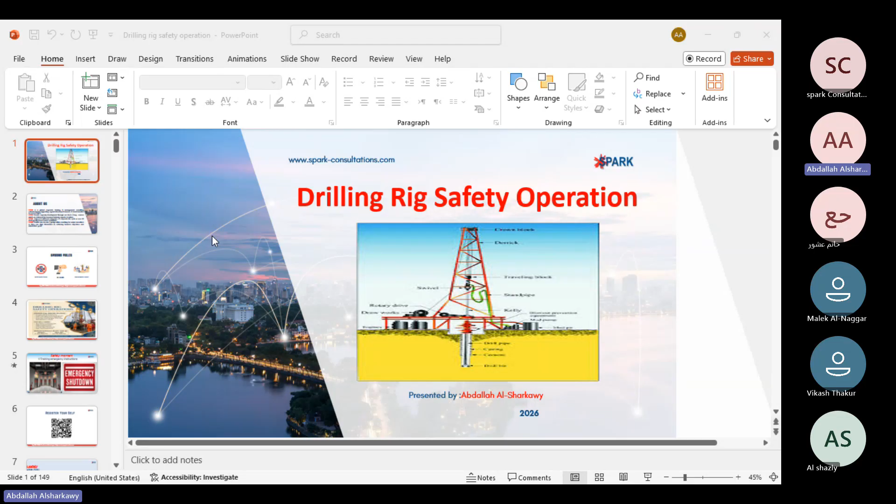We will start with some definitions about rig pass and safe drilling operation. Rig safety. What's the meaning of rig safety? It is the key to enter any drilling rig or workover rig, to have full knowledge of the hazards involved in the drilling operation. The drilling sector is one of the most dangerous fields in the oil and gas industry.

Rig safety is designed to provide the drilling crew and all drilling personnel a basic orientation for rig operation and safe working practice, to improve the safety performance of service contractors and exploration and production operators, and to assist both in satisfying federal, state and industry regulations and recommended practice.

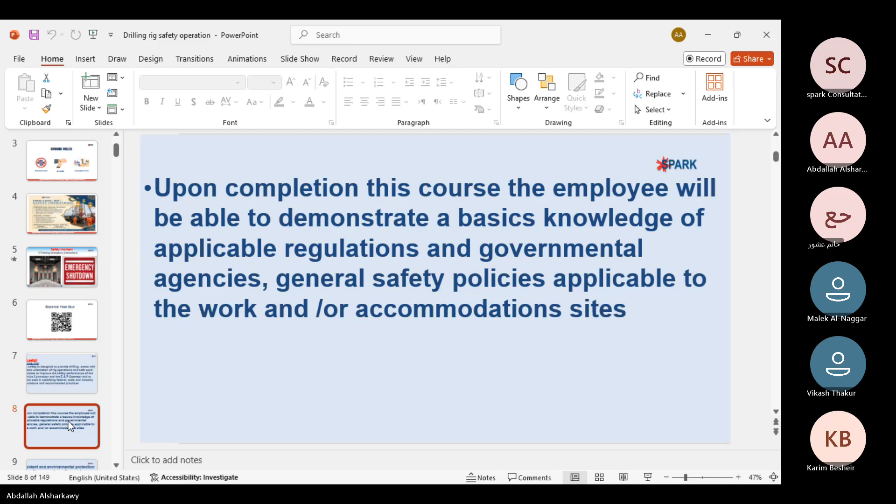Upon completion of this introduction course, the employee will be able to demonstrate a basic knowledge of the applicable regulations and governmental agencies' general safety policy applicable to the work and/or accommodation sites. What is the incident and environmental reporting procedure? The service contractor and customer working relationship, and employees' responsibility toward incident reporting in the drilling sector.

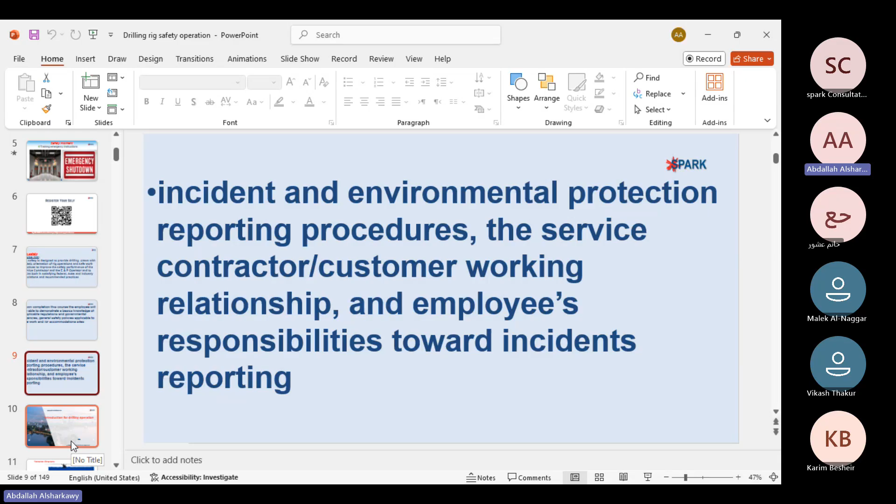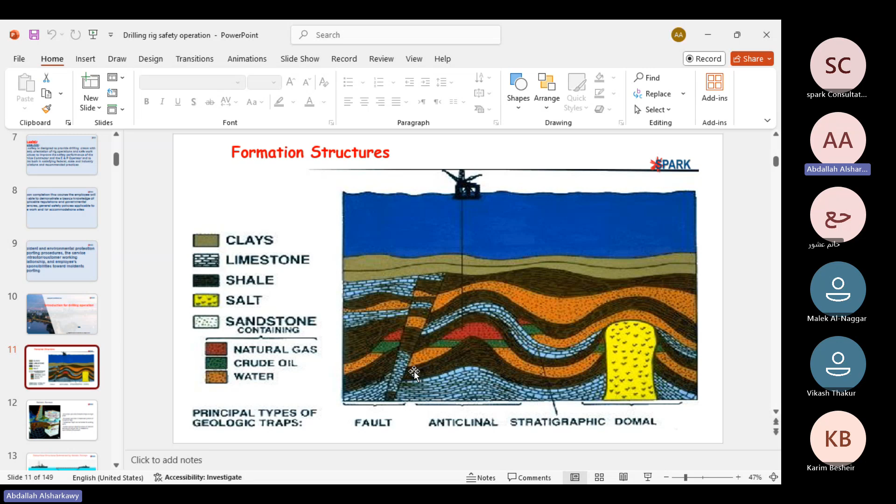The seismic survey is done by service companies, such as Halliburton, Schlumberger; many service companies carry out the seismic survey before the drilling process, at the beginning of the exploration process.

Types of drilling rigs. Drilling rigs are of two types. The first type is onshore drilling, and the second type is offshore drilling. And every type is subdivided into other types of drilling rig, such as conventional, fast-moving and heli-transportable rigs. For offshore, we can see submersible, semi-submersible, jackup, and also drill ship.

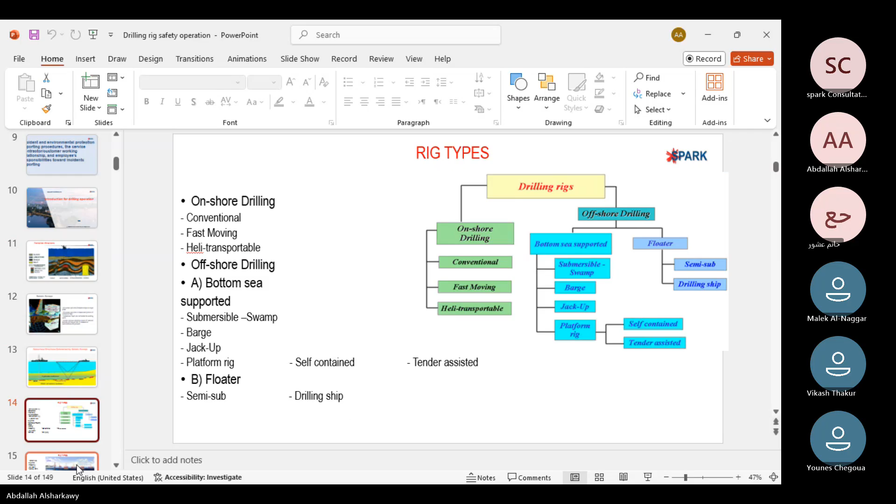All depends on what depth you want to reach, what depth you will produce oil or gas from. It depends on the exploration process, and the seismic should be applied before drilling operation. Then it depends on the horsepower of every rig. Horsepower differs from one rig to another to reach the required depth.

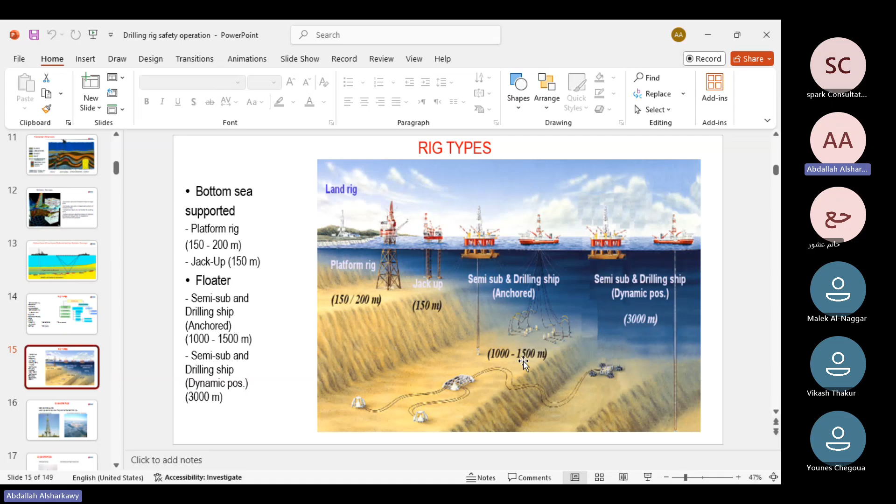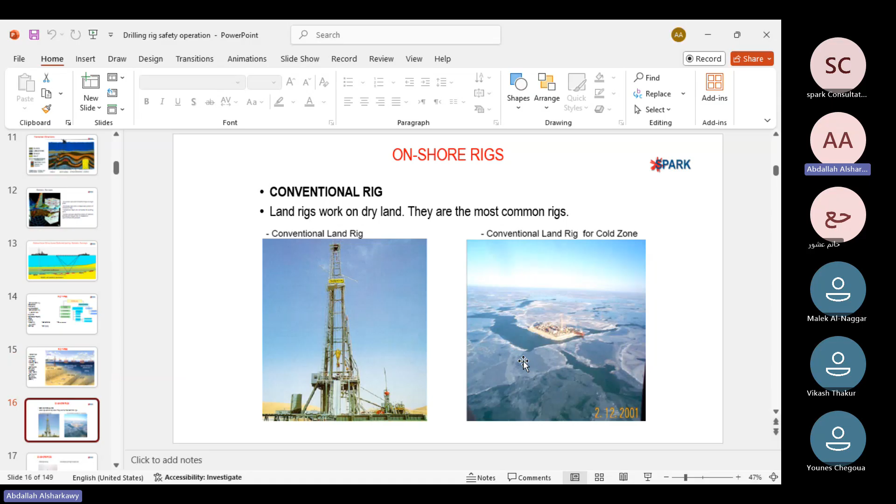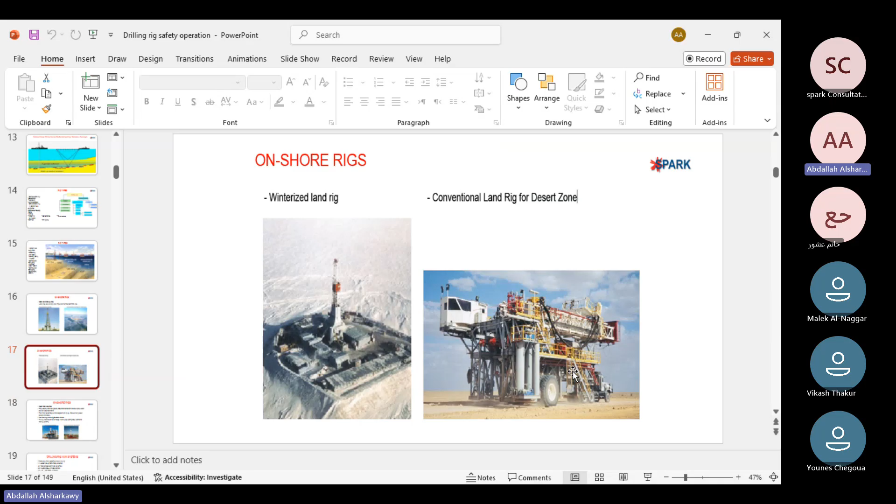Many examples of onshore rigs: conventional rig, and conventional rig for cold zone, as shown. Onshore rig, winterized land rig, and conventional rig for desert zone. This drilling rig is fast moving, equipped with wheels, and it is moved by heavy truck from one well to the other well. It needs road survey and very good leveling to move this rig from the old well to the new well.

Onshore rigs include the fast moving rig, and we can call it a workover rig. These usually have low power and dimensions for shallow wells, workover and abandonment. Their main advantage is their capability to rig up, move and rig down quickly and easily, from 2 days to 6 days.

Fast moving land rig G200 Soilmec. This rig handles stands of range 3 drill pipe, with a completely automatic racking system; 3 pipes of drill pipe are called a stand, and every stand contains 3 joints of drill pipe.

Drilling rig main systems. There are 4 main systems on a drilling rig: the hoisting and rotation system, the power generation or diesel generation system, the mud circulating system, and well control equipment. Hoisting and rotation system: mast, substructure, crown block, traveling block, top drive, then rotary table, drawworks system, drilling line, deadline anchor. These are all components of the drilling rig.

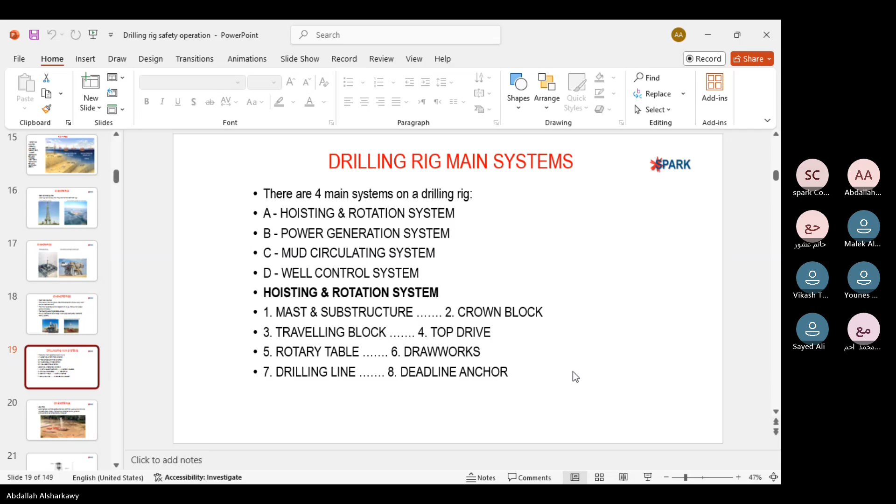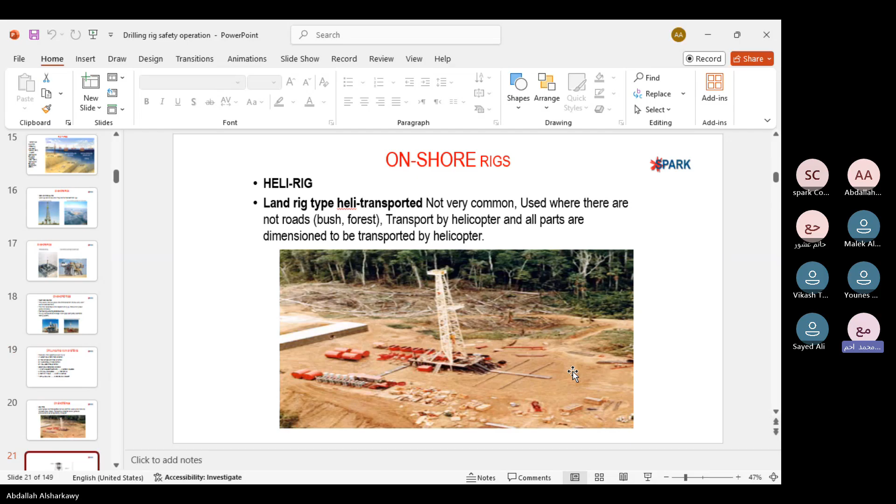This is the shape of drilling rig. From the top, crown block, and the traveling block, and top drive. And this construction is called mast. This is the mast of the rig. This construction on the pointer is called mast. So the mast consists of beams, I-beams and cross beams.

This mast contains the crown block and traveling block and top drive system. And this construction is called rig floor or substructure. Substructure is the first stage of the drilling rig. The second stage is the mast. So it is the main component of the drilling rig.

Workover rig. Workover rig mast is small and contains two joints of drill pipe, not three, but here is three joints called stand. The workover rig is called double stand. This is a clear difference between the drilling rig and workover rig.

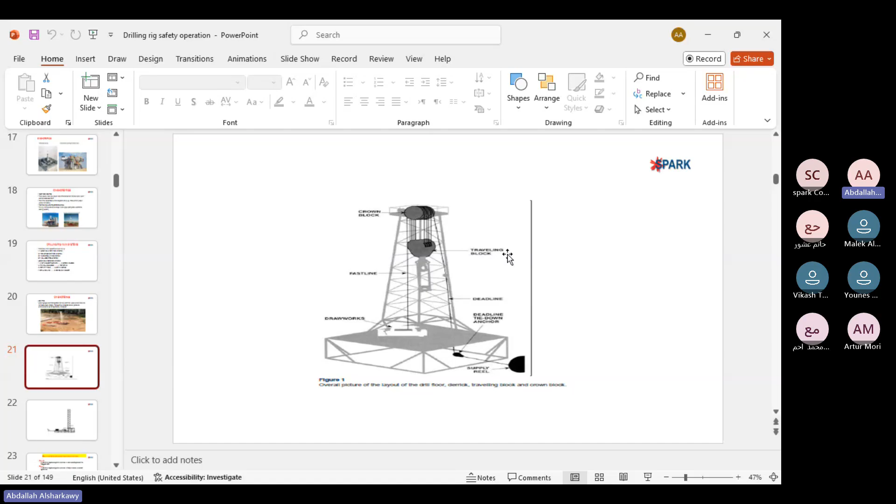Workover rig is for the workover operation such as frac operation, nitrogen operation, cleaning, tripping operation, acid injection, but drilling rig for cement job, casing job, and other complicated operations, but workover rig is used for cleaning and trip in, pull out of hole, run in hole operation.

Before you enter any drilling rig, you must have very important knowledge about the zones of this drilling site. Drilling site contains zones. Zone 0, zone 1 and zone 2. Zone 0, in which an explosive gas and air mixture is continuously present for long periods. Zone 1, in which an explosive gas mixture is likely to occur in normal operation. Zone 2, in which explosive gas mixture is not likely to occur in normal operation.

In some countries, class and division classification is used instead of zone classification. We can verify the difference between the British classification and the American classification for rig site. We are showing the British classification, zone 0, zone 1, zone 2. But the American classification divides every zone into class and division.

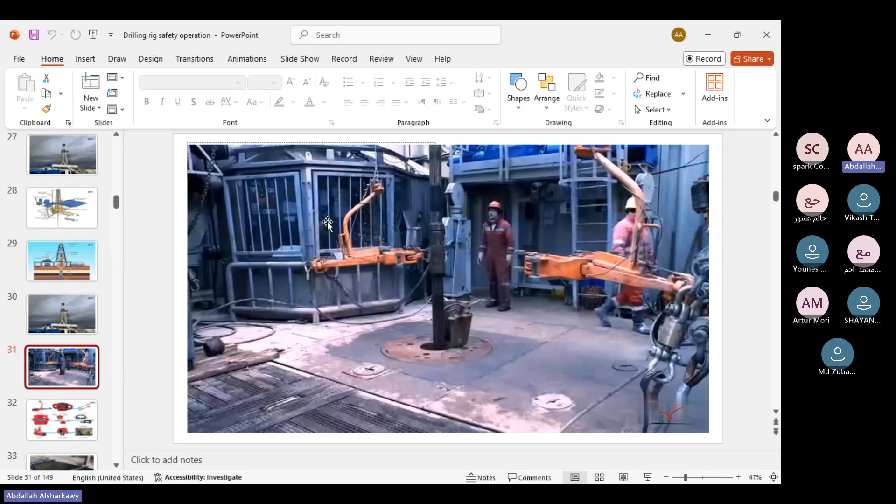What is this board? Finger board or derrick board? It is the board where the monkey man or derrick man works to connect and disconnect drill pipe in coordination with the driller at the rig floor. And we can see also another. This is the rig floor and this is the driller cabinet or console. Driller works as supervisor and controller of the top drive and draw work system and every powered equipment at the rig floor.

So this is monkey board or derrick man board. Derrick man board to connect and disconnect drill pipe during trip in or trip out operation, in other terms pull out of hole or run in hole. This is the rig floor area containing setback area, heavy wooden plates to install drill pipe on it. This is BOP area, blowout preventer.

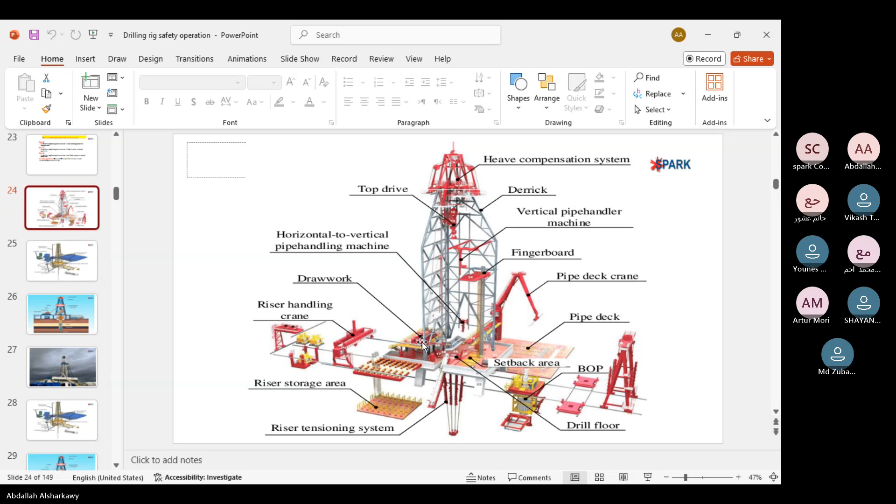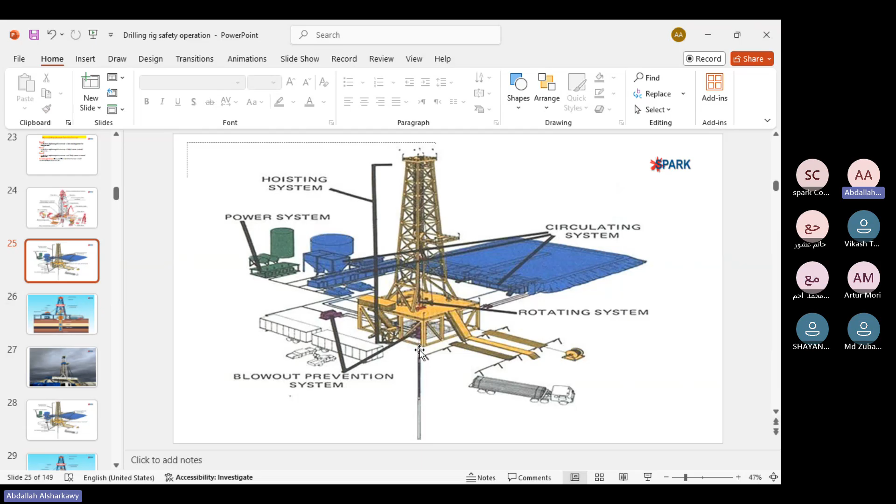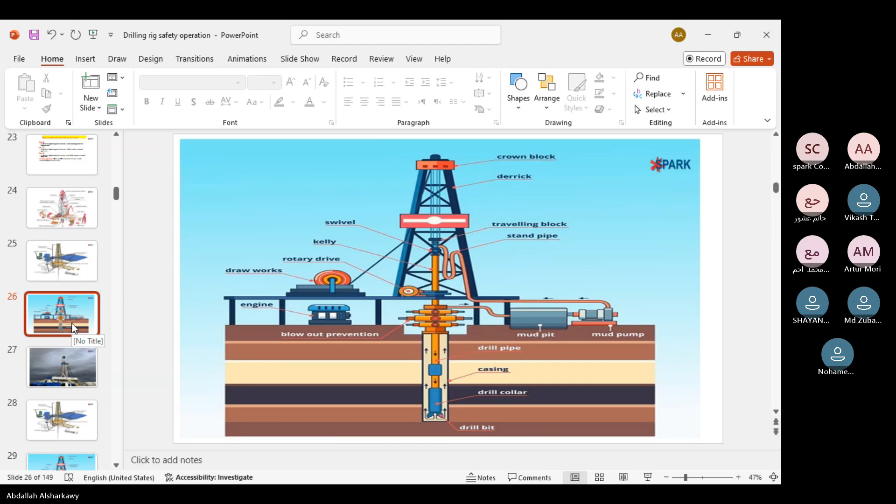This is a drilling rig. This is the mast, constructed from beams, and this blue board is the monkey man or derrick man board. He works above this construction to connect drill pipe, to install stands in the hole or pull stands out of the hole. And this rubber hose is a mud hose circulating mud inside the well.

This is the drill pipe inside the well. This is the well and this is drill pipe. How do these people connect this tool joint to each other? By tongs, right and left, to connect every joint to the other to construct three joints. Three joints are called a stand in the drilling rig, and in the workover rig a double joint is called a stand.

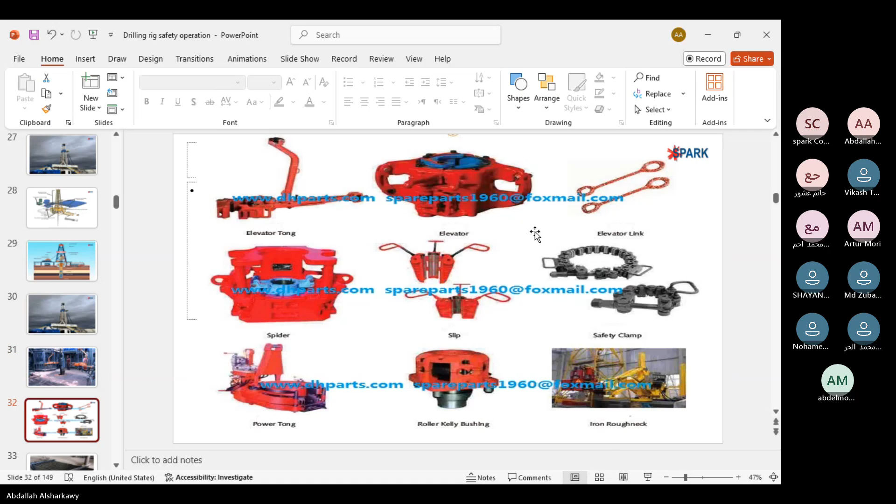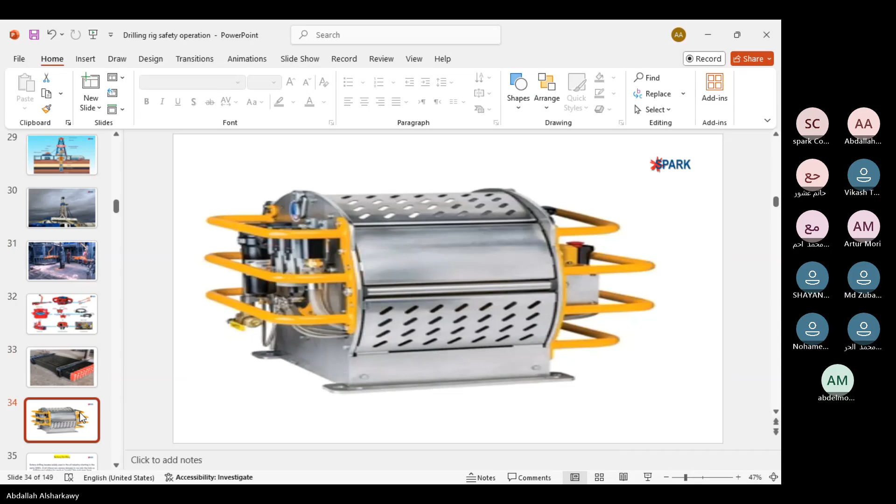Every drilling rig contains three types of winches. The first is the man riding winch. It is designed only for lifting persons. The other winch is called air tugger or air winch, with high safe working load. It is used for lifting drill pipe and casing pipe. Every drilling rig should contain two heavy equipment air winches. The third type of air winch is called the BOP winch, blowout preventer winch, used for rig up and rig down of the BOP.

Again, every drilling rig contains three types of air winch or hydraulic winch. The first type is man riding only, the second type is equipment lifting only, and the third type is designed only for rig up or rig down of the BOP, the blowout preventer air winch.

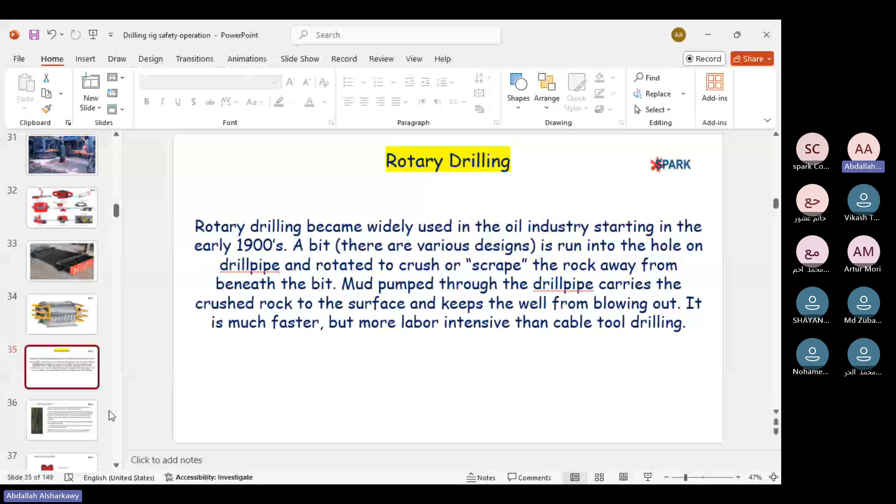Drilling a well. A drill bit designed for the expected type of formation to drill is lowered into the well on the drill string. The drill string and the bit are rotated by a rotary drive on the rig floor, a top drive in the derrick, or a mud motor directly above the bit, which is powered by the force of the mud flowing through it. The bit crushes or grinds the rock beneath it into pieces called cuttings.

Drilling mud is circulated down the drill pipe and through openings called jets in the bit. The mud washes the formation cuttings from beneath the bit and carries them to the surface. When the bit fails or wears out, all of the drill string must be pulled from the hole to replace the bit. It is called a trip: trip in or trip out operation.

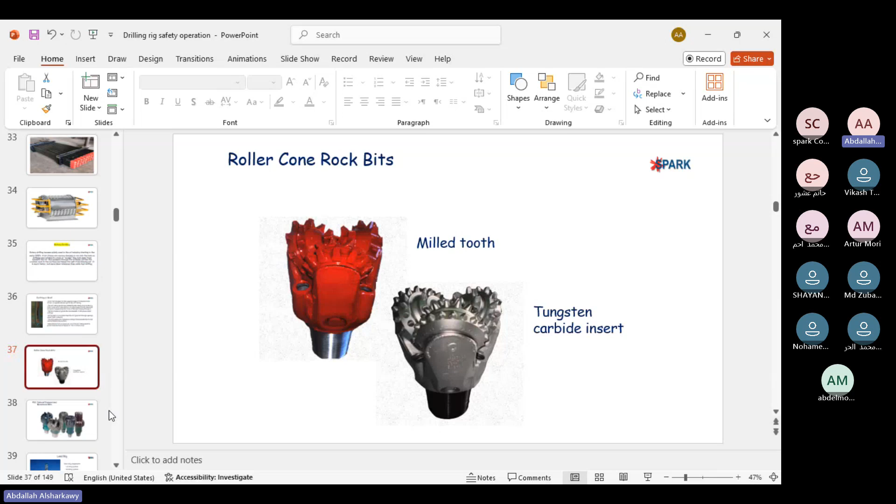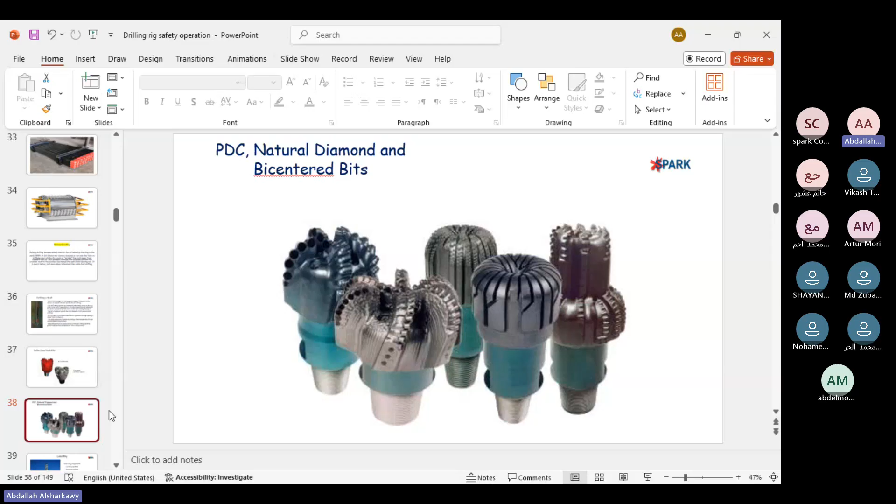Types of bits: roller cone rock bits, mill tooth, tungsten carbide insert, PDC, natural diamond and bicentered bits, as shown in many shapes of drill bits. Basic rig components: hoisting system, rotating system, power plant system, mud circulating system, well control equipment. All other rigs adopt these basic components to their working environment.

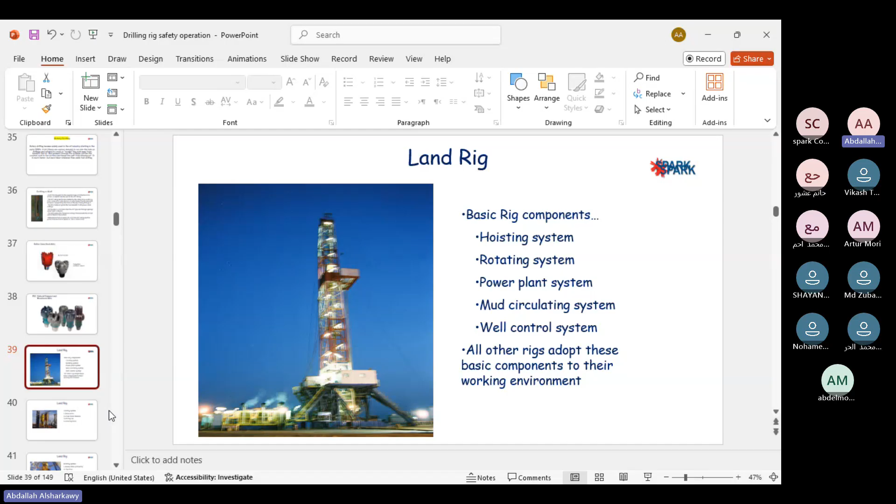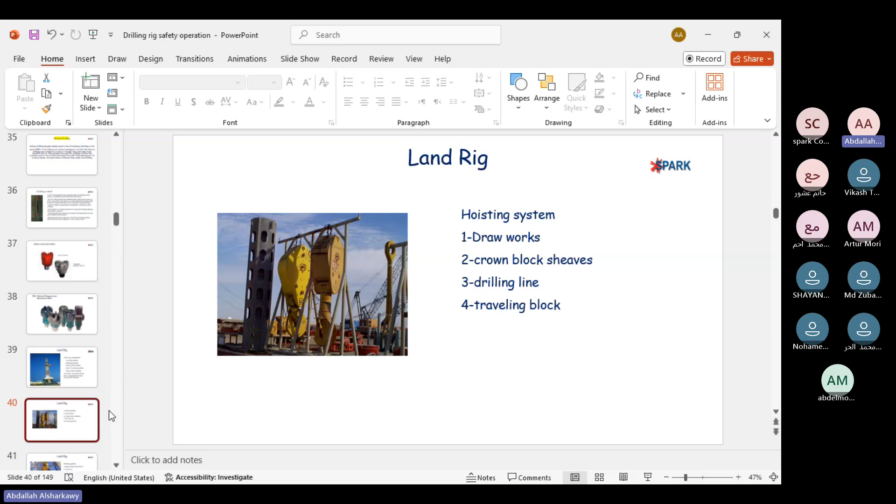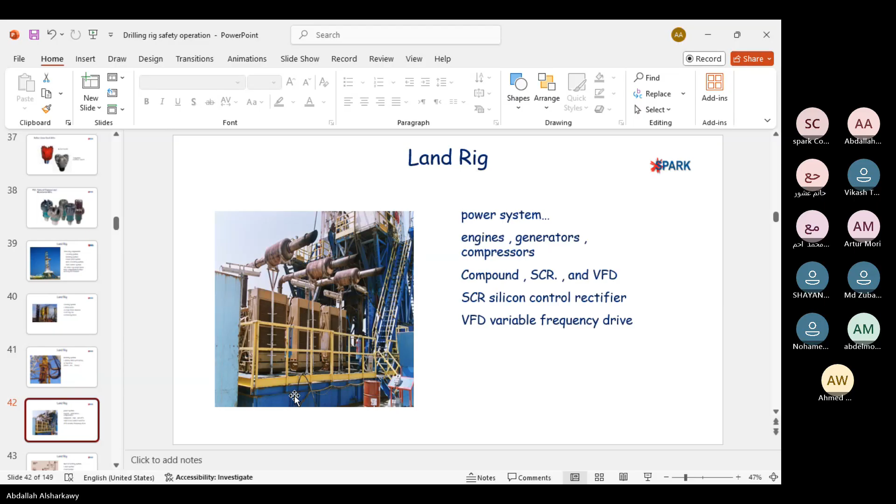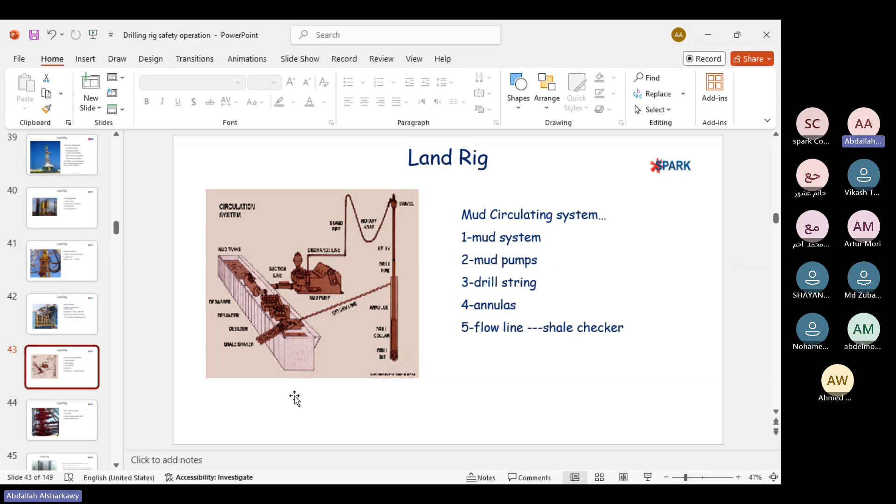BOP, blowout preventer. It is located under the rig floor. It is critical equipment at any drilling rig. It should be inspected Category 1, Cat 2, Cat 3, Cat 4, and Cat 5. Why? If any failure happened in the BOP system, it would lead to complete damage or fire of the drilling rig, and would put personnel in a high risk state.

Any failure of function of the BOP will lead to fire and explosion of the drilling rig and could lead to loss of life of the drilling crew. Well control equipment is divided into diverter, blowout preventer, and BOP control unit.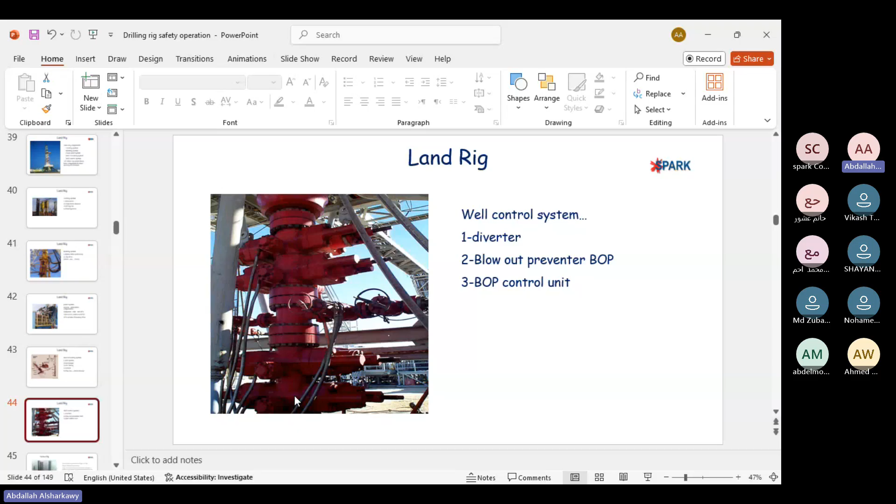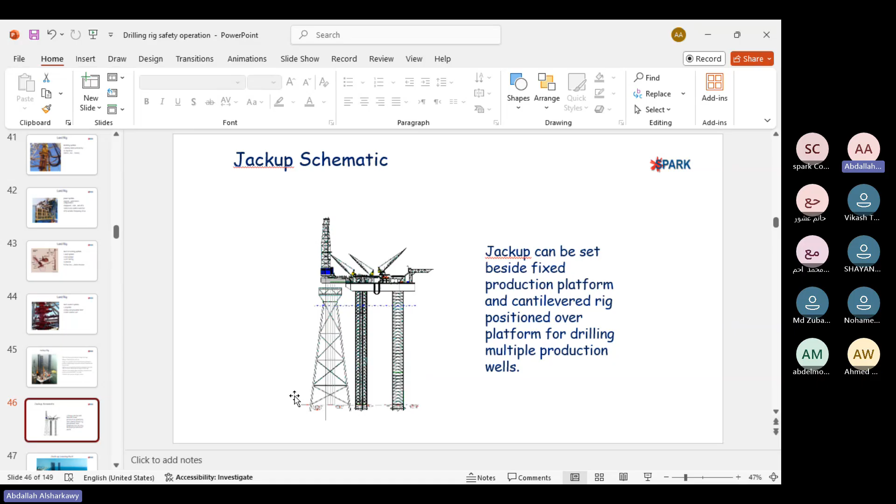Jack-up schematic. A jack-up can be set beside a fixed production platform and the cantilevered rig positioned over the platform for drilling multiple production wells. Jack-up leaving port. Jack-up in port.

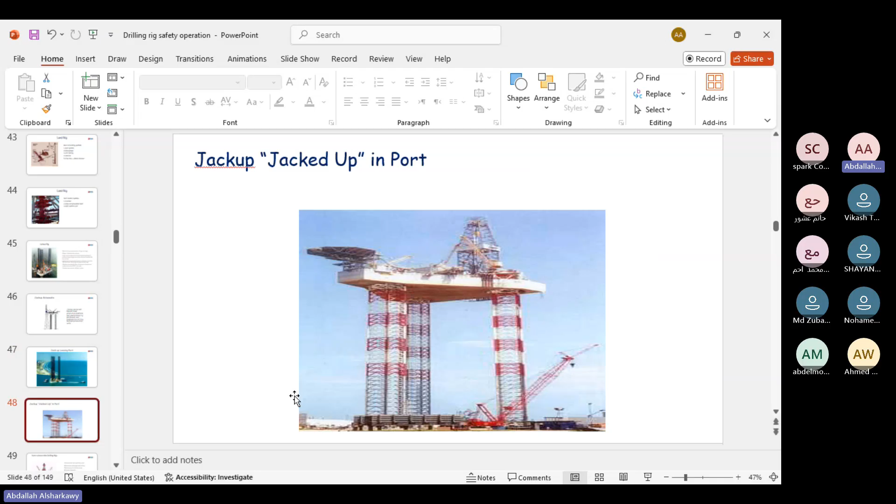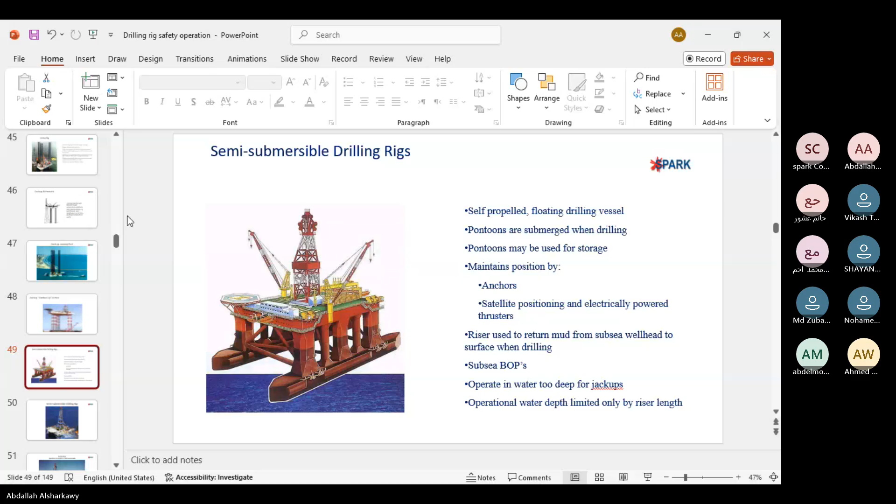Semi-submersible drilling rig. Self-propelled floating drilling vessel. Pontoons may be used for storage. Position is maintained by anchors or satellite. A riser is used to return the mud from the subsea wellhead to the surface when drilling. Subsea BOP, operated in water too deep for jack-ups. Operational water depth is limited only by riser length. Semi-submersible drilling rig, as shown. Drill ship operations are similar to semi-submersibles.

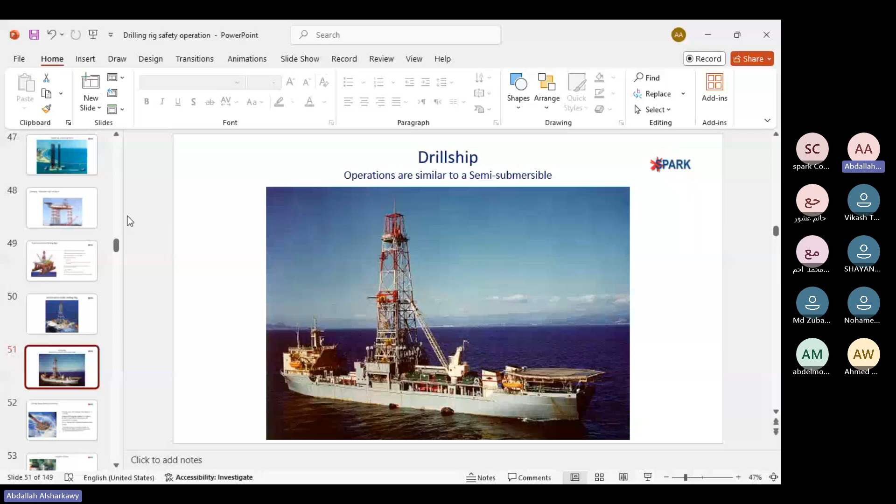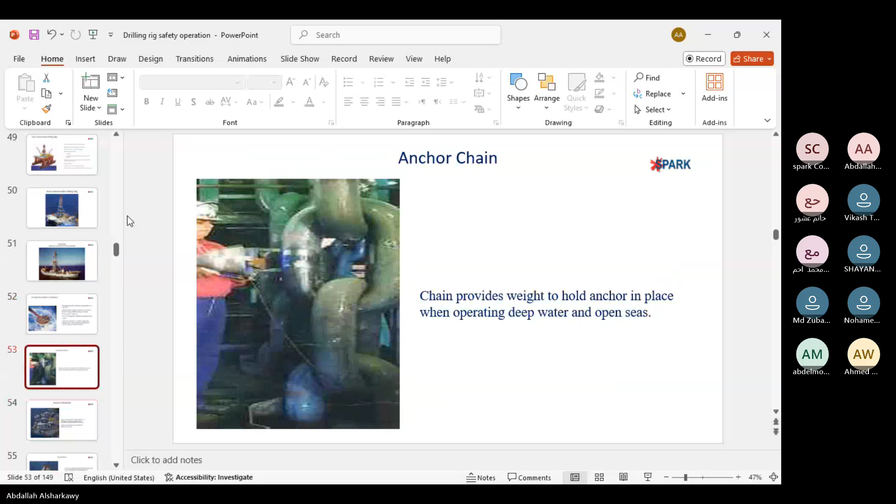Top drive. The top drive is suspended from the traveling block. It rotates the drill string and drill bit. Drilling mud circulates through the kelly hose and down through the drill string to the hole. As we saw before, we are wet drilling, not dry drilling. Wet drilling with a chemical called mud.

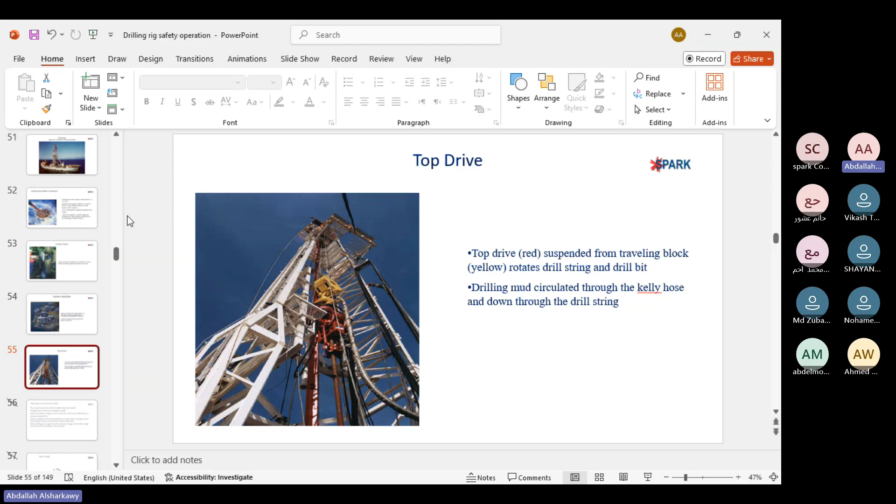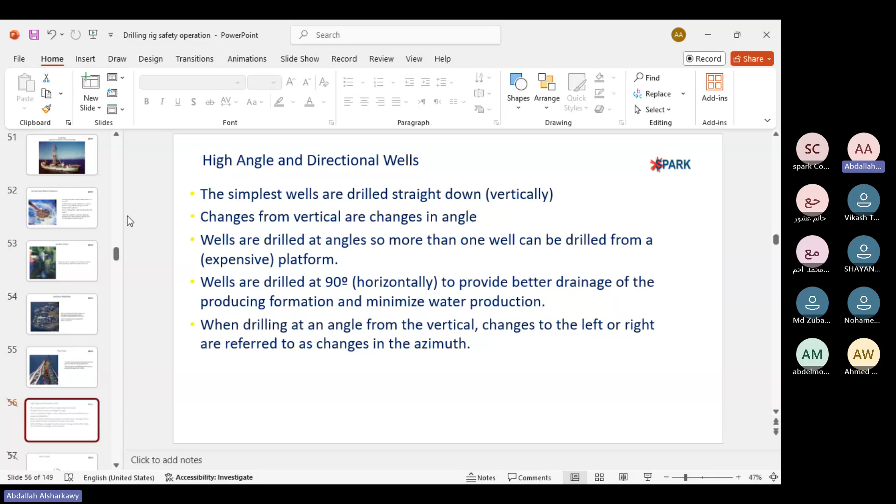High angle and directional wells. The simplest wells are drilled straight down vertically. A change from vertical or change in angle is called directional drilling. Wells are drilled at an angle so more than one well can be drilled from an expensive platform. Wells are drilled at 90 degrees horizontally to provide better drainage of the producing formation and minimize water production. When drilling at an angle from the vertical, changes to the left or the right are referred to as a change in azimuth. Hole angle, called directional drilling.

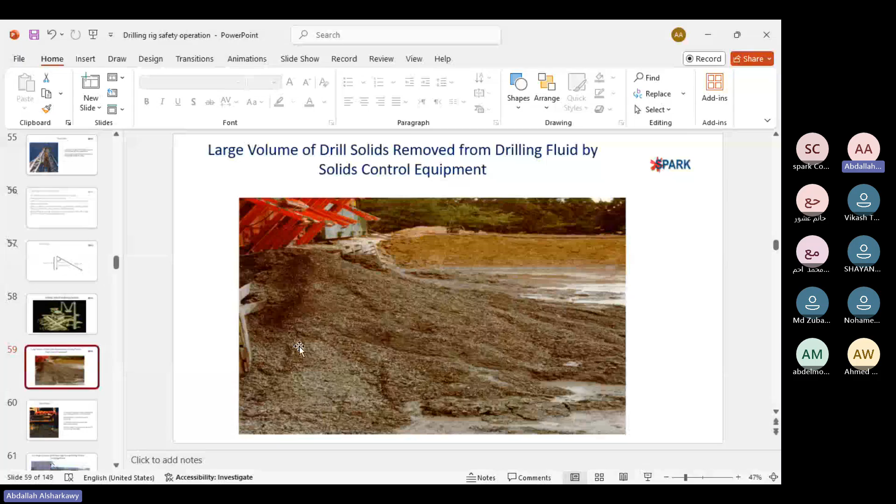After mud exits from the hole or from reflux, it is carried out at the shale shaker or solid control equipment to the mud pit. This is the mud pit. It contains the cuttings exiting from the shale shaker or solid control equipment. This is a sample of a shale shaker.

In the shale shaker, the soft clay or soft mud enters to forward to the tanks, and the cuttings and solids exit to the waste pit or mud pit. It is the first piece of solid control equipment the mud passes through when it reaches the surface. It separates drill solids from mud by screening. Vibration of the screen increases the processing capacity. Several shakers are often used at once to process high flow rates.

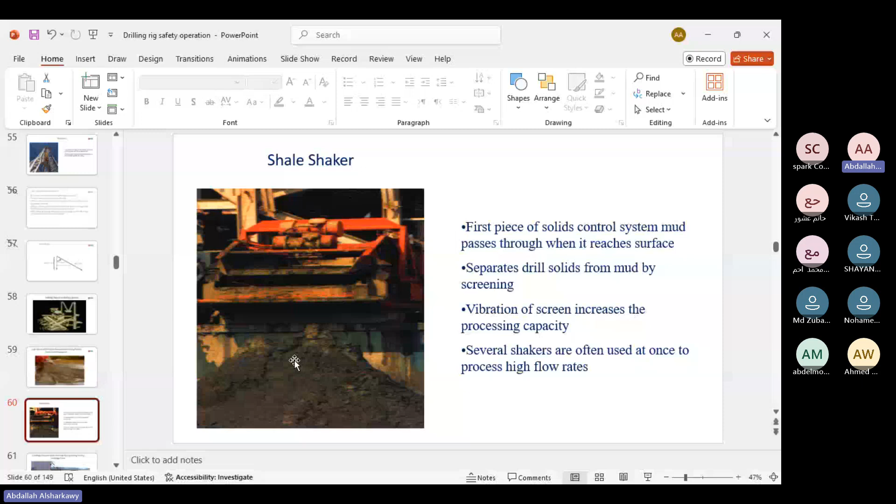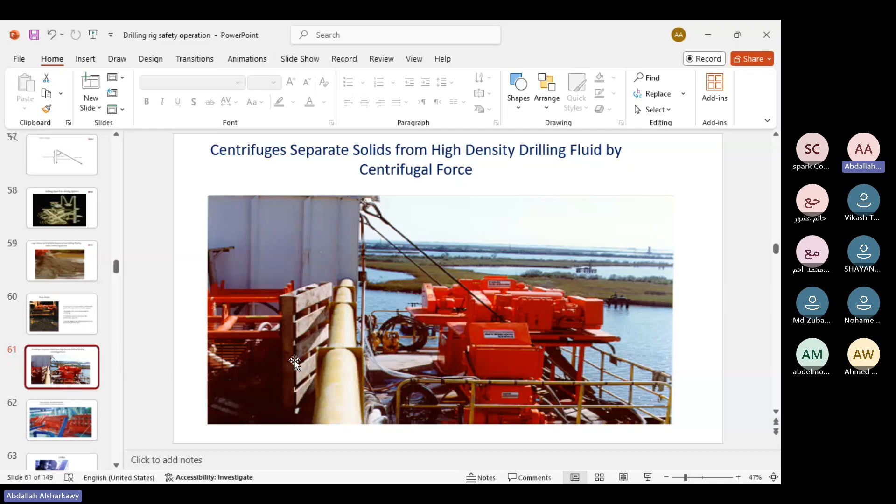This is another shape of shale shaker or solid control equipment. The centrifuge separates solids from high density drilling fluid by centrifugal force. Hydrocyclone desander and desilter are used to separate drill solids from low density fluid. All this, called solid control equipment, is to improve mud properties before

redirecting it to the hole by mud pump to the drill pipe through the top drive, and through the drill pipe to the bit, and then to the formation, and the reflux to be returned to the mud tanks.

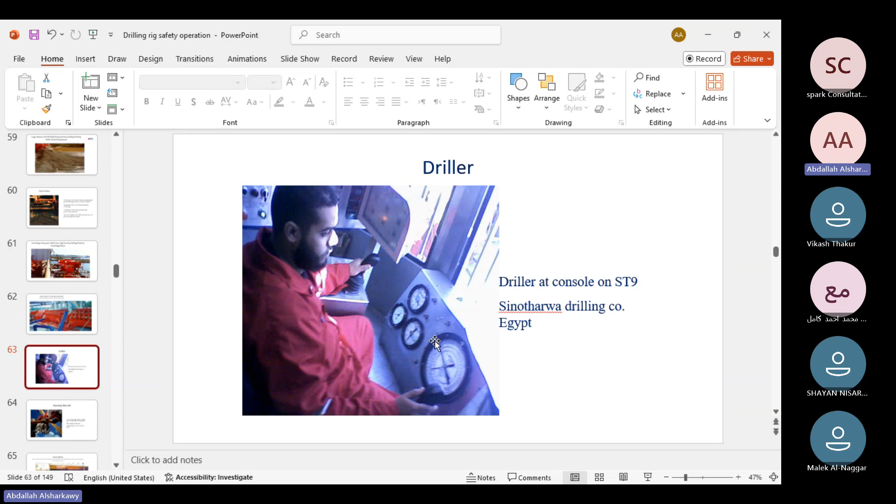We are back again to continue the drilling rig safety operation course. This slide shows the driller cabin. This is an actual photo from the driller for Sinotharwa Drilling Company, rig number 9 in Egypt. This is the control room of the driller. The driller is supervisor of his crew. He's a key person. He controls the top drive, drawworks and all drilling equipment at the rig floor.

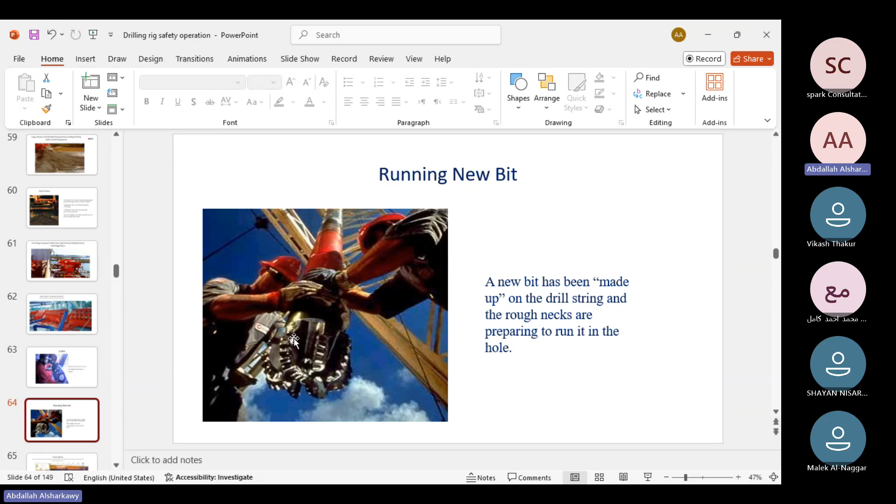Running a new bit in the hole. A new bit has been made up on the drill string and roughnecks are preparing to run it in the hole. Drawworks system. As we said before, every drilling rig is known by its horsepower.

Horsepower refers to drawworks or drum capacity, which is used to pull the drill line through the crown sheaves and traveling block, raising and lowering the drill string in the hole, and also lowering and raising the mast and substructure. All this operation is made by this equipment called the drawworks system.

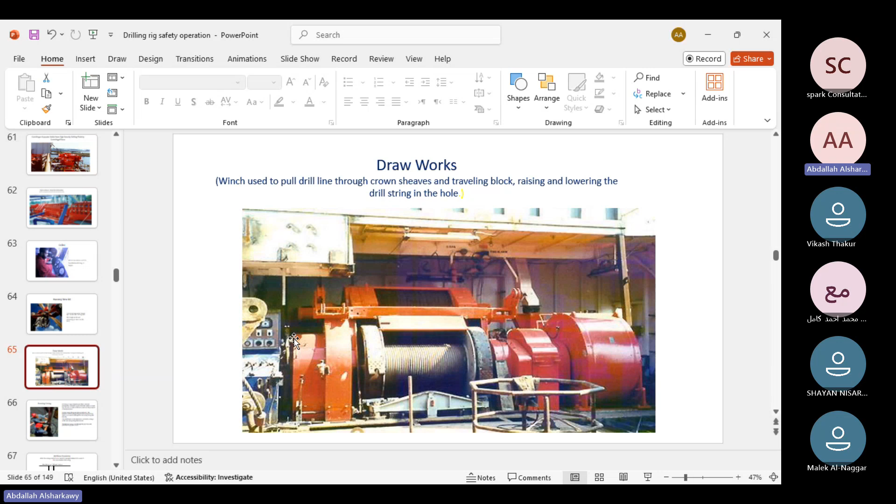Running casing. Casing is large diameter pipe permanently cemented in place from the surface or mud line of the well, to stabilize the hole and seal off pressurized or fractured zones to prevent hole fill. Several casing strings are run on each well.

The diameter of each casing string becomes progressively smaller as it must fit through the last casing string that was run. The BOP stack or Christmas tree is bolted to a flange on the last casing string that was run. Production casing is set through the pay zone and perforated to produce the well in the oil reservoir.

This is the diagram of the hole: open hole, liner or production casing, intermediate casing, surface casing, and this is the surface or wellhead. After the casing or liner is run, cement is pumped behind to seal off the zone behind the casing, between formation and casing. Again, you should know that cement is pumped into the space between casing and formation.

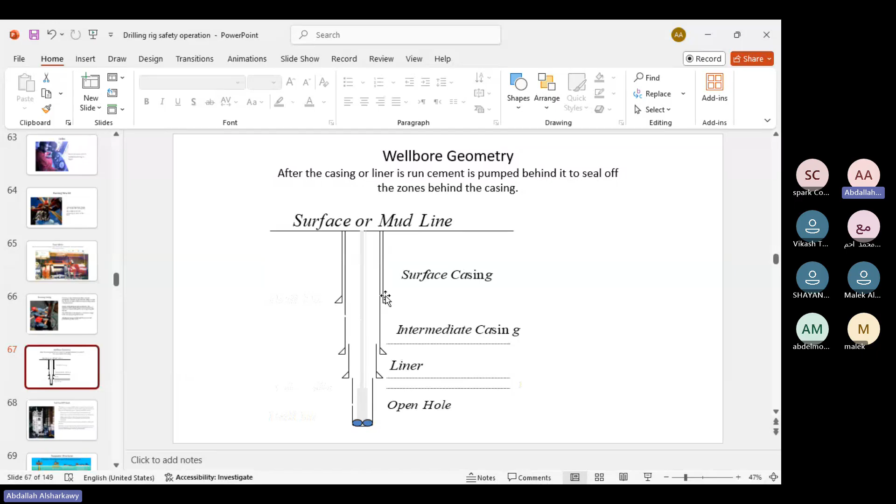Pipe ram, which will close and seal around the drill pipe. Blind ram, to seal the well off when the pipe is out of the hole. Shear ram, which is used to shear any pipe in the drill string, including drill collars, and seal the well off in an emergency.

The BOPs have connections for riser and booster, choke and kill lines, one on the right and the other on the left. Choke and kill line: the choke to absorb the pressure released or coming from the hole, and the kill line to kill the well in case of a kick or blowout.

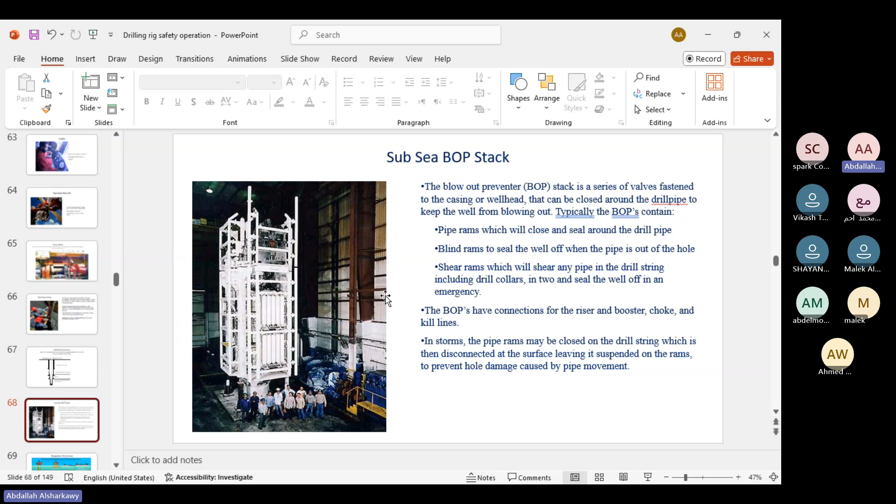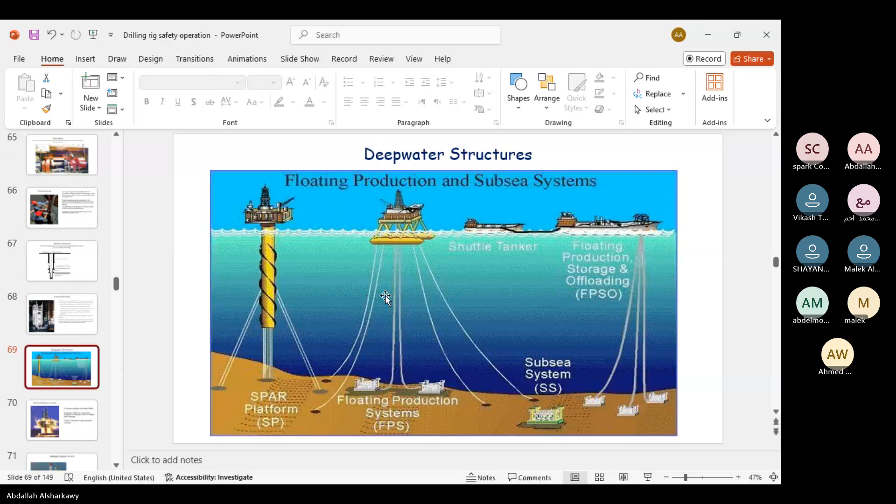In a storm, the pipe ram may be closed on the drill string, which is then disconnected at the surface, leaving it suspended on the ram to prevent hole damage caused by pipe movement. Deep water structures, floating production, and subsea systems. Different shapes of offshore drilling rigs.

In this section, we will explain and demonstrate many terms and hazards involved in the drilling sector. Keywords, abbreviations and terms. IOGP Life Saving Rules. International Association of Oil and Gas Producers, IOGP Life Saving Rules, LSR.

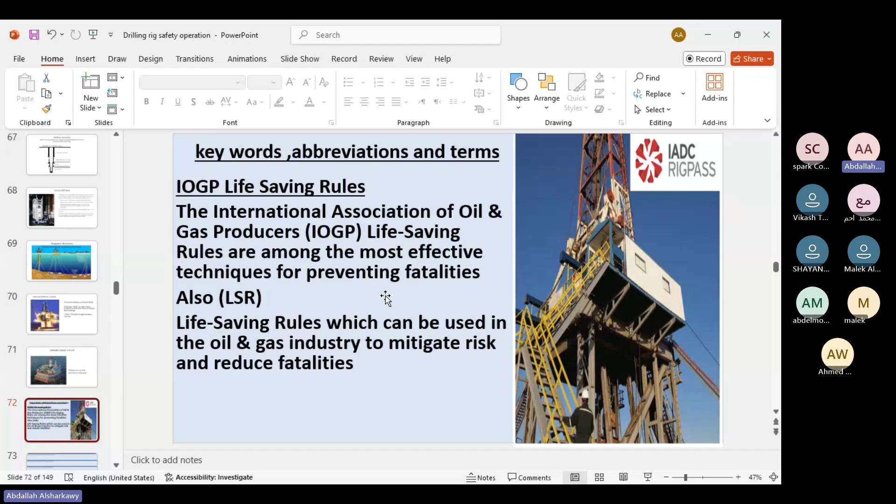Among the most effective techniques of preventing fatalities are life-saving rules, which can be used in the oil and gas industry to mitigate risk and reduce fatalities. IADC is the guideline or main standard of the drilling industry, the International Association of Drilling Contractors.

IOGP, International Association of Oil and Gas Producers. E&P companies, Exploration and Production companies. PPE, Personal Protective Equipment. COW, Control of Work. ISP, Incident Statistics Program.

SSOF, Safe System of Work. PTWS, Permit to Work System. JSA, Job Safety Analysis. JRA, Job Risk Assessment. PJSM, Pre-Job Safety Meeting. TOFS, Time Out for Safety.

Again, Safe System of Work is some instruction referring to three factors. The first factor is the policy. Every drilling company has a policy called HSE policy. The second factor is safe working instruction. Every drilling or workover rig should have safe working instruction. The third factor is SOP, Safe Operation Procedure. You should know these three factors consist of Safe System of Work.

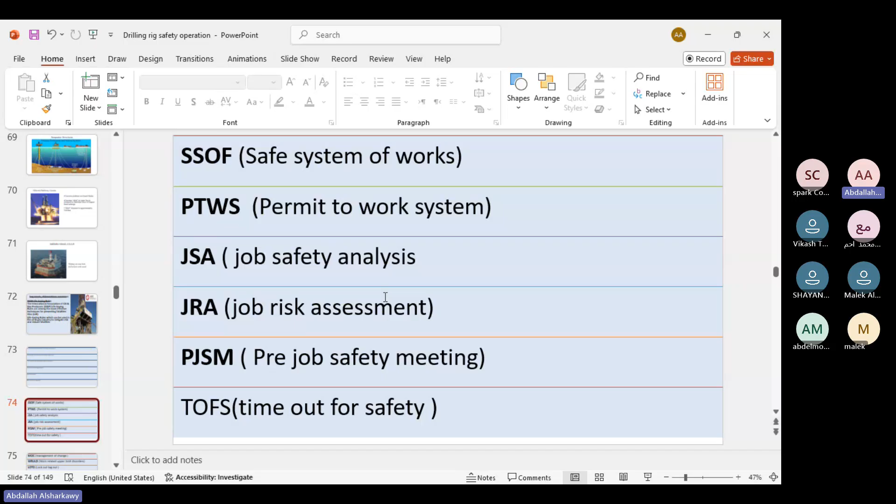What is management of change? In the drilling rig, you can see change of design, change of construction, change of operation, any project activities. It should obey the MOC document, approved by the assigned departments. This is called MOC, management of change. Other terms: MOC can be for design change, procedure change, project change, and asset change. MOC should be approved by top management.

Work-related upper limb disorder. It refers to muscular disorder and disease.

LOTO, lockout tag out, for isolation of powered equipment. We will divide it into two parts: the first part is mechanical isolation, and the second part is electrical isolation. If you're working in maintenance or in the drilling crew, you should have the lockout tag out procedure - how you can lock the powered source and tag a sign to prevent anyone from accessing your job.

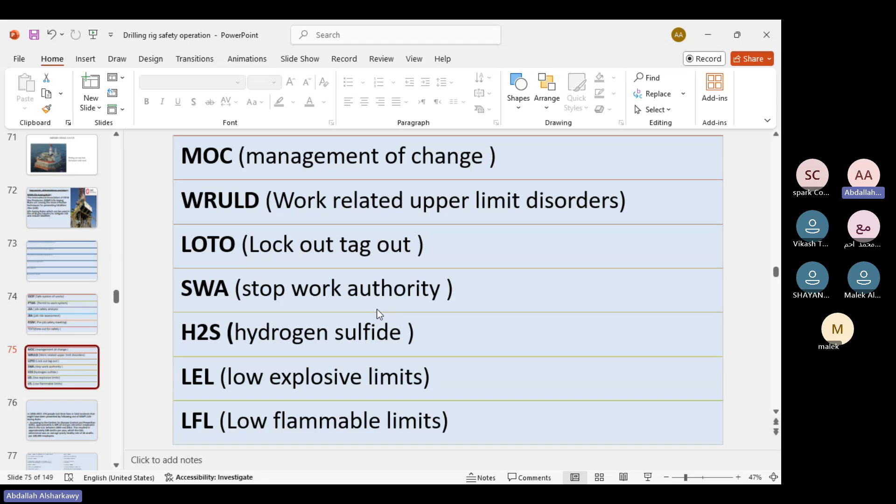We will show the main RigPass elements: basic safety, respect for coworkers, drug and alcohol policy, driving safety, personal protective equipment, hazard awareness communication, hand safety, good housekeeping in the rig, electrical safety appliance, hazardous material, occupational health, hydrogen sulfide, job safety analysis, back safety, working at height, dropped objects, lockout tag out, rigging and lifting operation, forklift safety, environmental protection and waste management, wildlife hazards awareness worldwide, permit to work system, management of change, first aid and blood-borne pathogens, fire prevention and response, incident reporting and investigation.

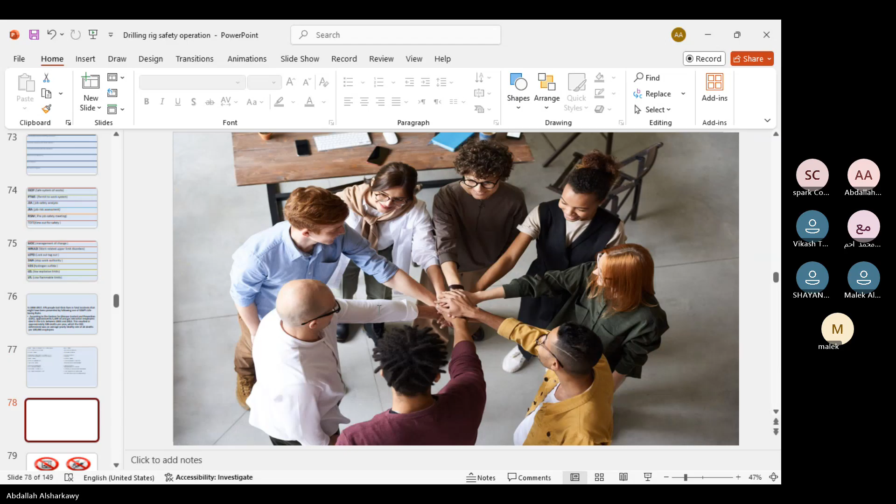Type of PPE. PPE includes high visible clothing, safety footwear, safety harness, eye protection, gloves. We have rubber gloves, cotton gloves, mechanical gloves, and electrical resistance gloves. Safety helmets, hearing protection, divided into ear plugs or ear muffs.

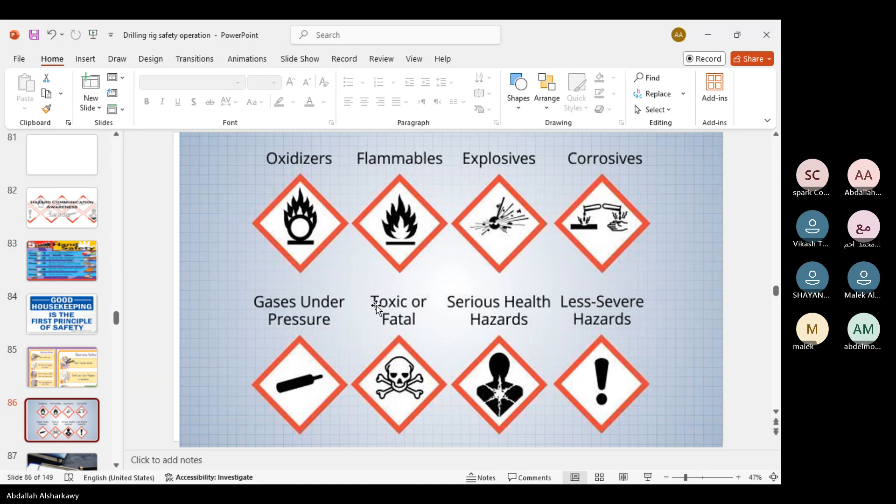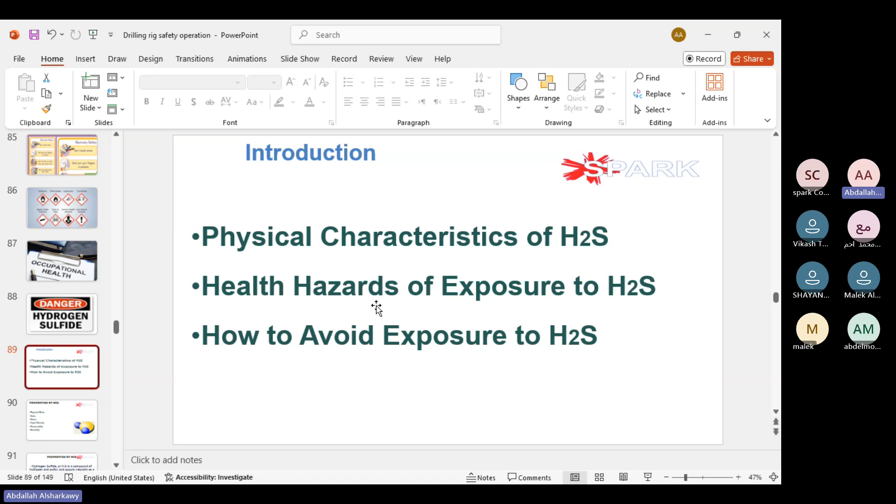Occupational health. Hydrogen sulfide. What is hydrogen sulfide? Physical characteristics of hydrogen sulfide. Health hazard from exposure to H2S. How to avoid exposure to H2S.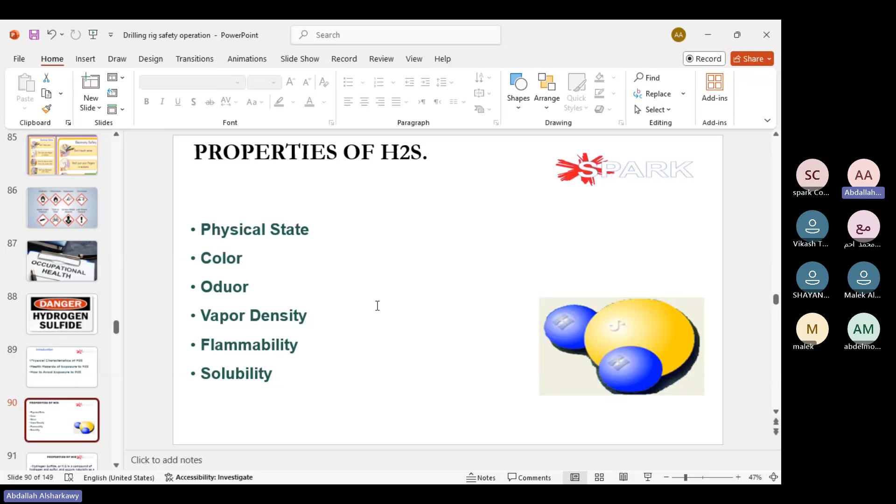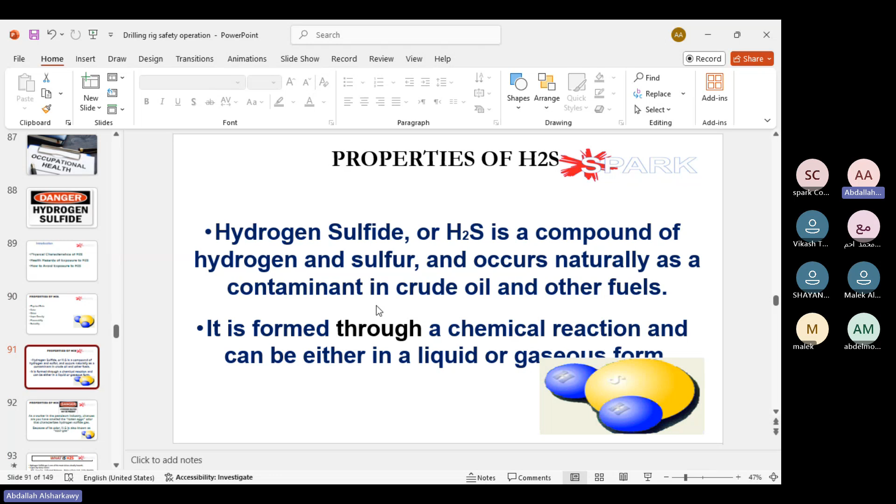Color, odor, vapor density, flammability, solubility. Hydrogen sulfide is a compound of hydrogen and sulfur and occurs naturally as a contaminant in crude oil and other fuel. It can form through a chemical reaction and can be either in liquid or gaseous form. As a worker in the petroleum industry, you may have smelled the rotten egg odor that characterizes hydrogen sulfide gas. Because of its odor, H2S is also known as sour gas.

Hydrogen sulfide gas is one of the most vicious deadly hazards. It is called by many names: H2S, sour gas, sulfurated hydrogen, hydrosulfuric acid, sulfur hydride. Every employer should provide training on protection measures and first aid where this gas is present and how to recognize it. There should be a policy concerning this gas, very close supervision, and awareness and precaution shall be kept at highest alert.

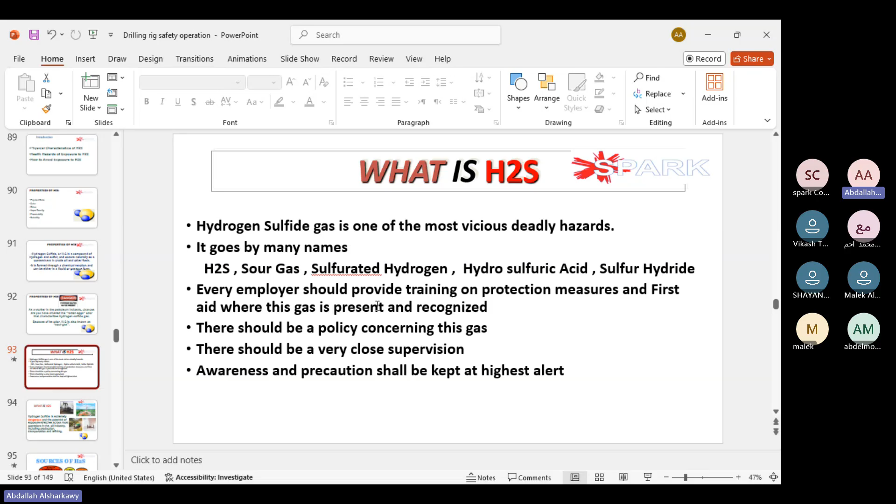Hydrogen sulfide is extremely dangerous and the potential for exposure stretches across most operations in the oil industry, including production, transportation, refining, and no doubt drilling.

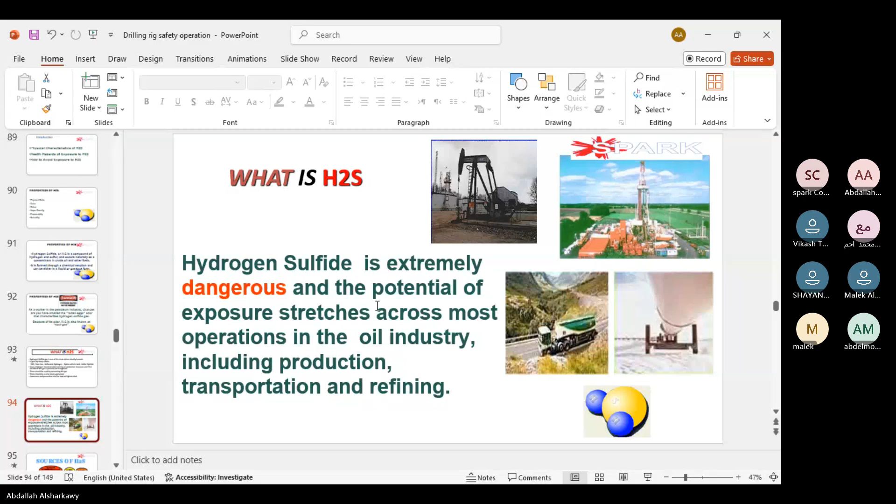Sources of H2S: gas plants, petrochemical plants, refineries, batteries, underground mines, sewers, blasting with black powder, oil and gas wells, commercial laboratories, sulfur recovery plants, and sewers.

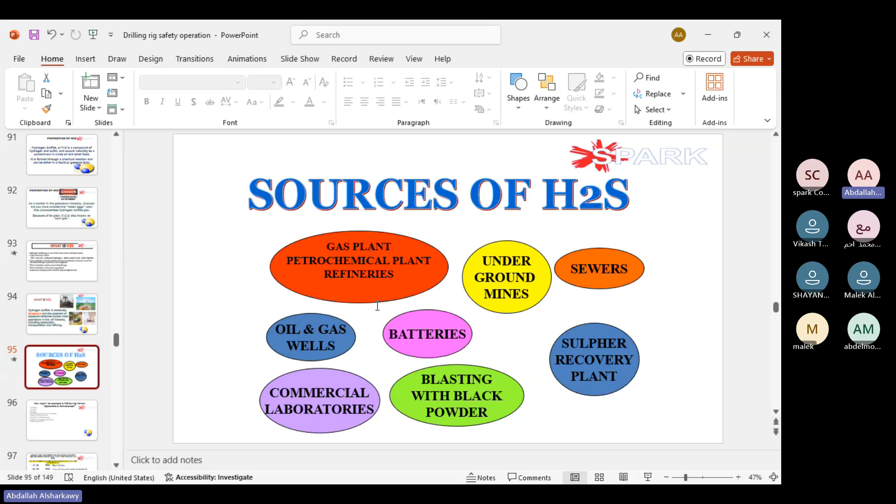Doses: from 10 to 20 ppm, irritation; from 20 to 100 ppm, loss of sense of smell, headache and nausea; from 100 to 300 ppm, respiratory difficulty and pulmonary edema; over 600 ppm, unconsciousness and sudden death.

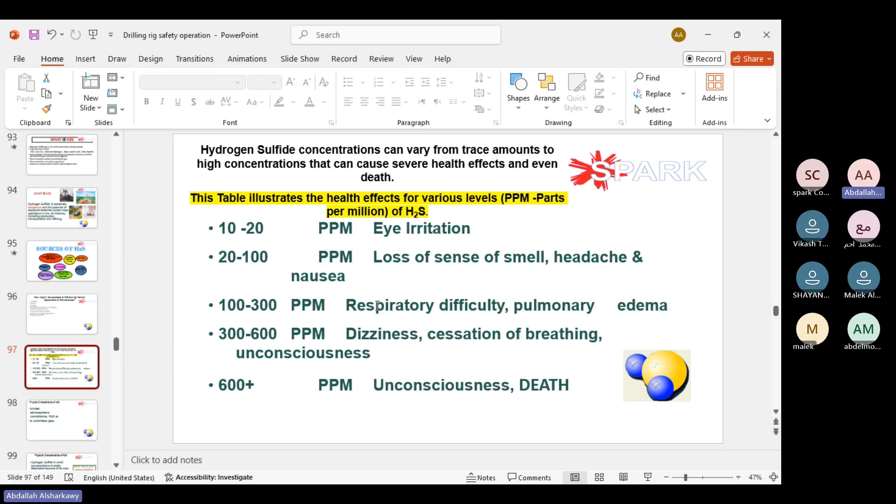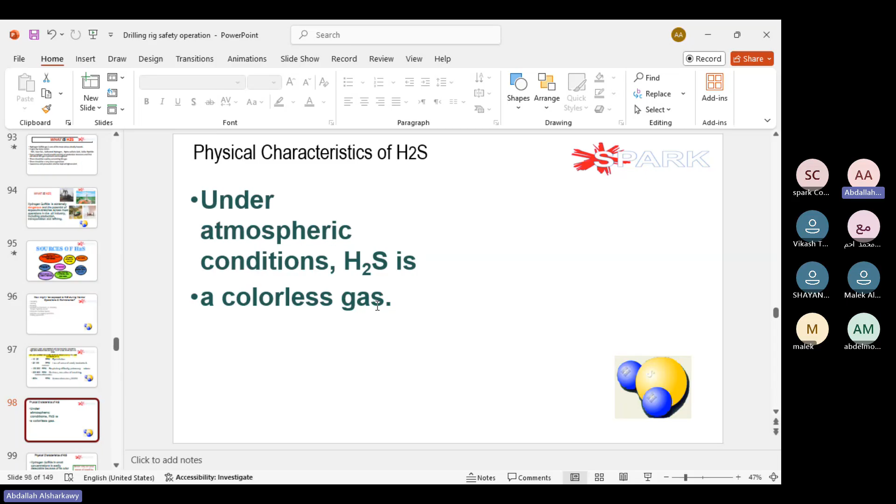Physical characteristics of H2S. Under atmospheric conditions, H2S is a colorless gas. Hydrogen sulfide in small concentration is easily detectable because of its rotten egg odor. Your sense of smell can detect H2S in concentrations of up to 25 to 30 parts per million.

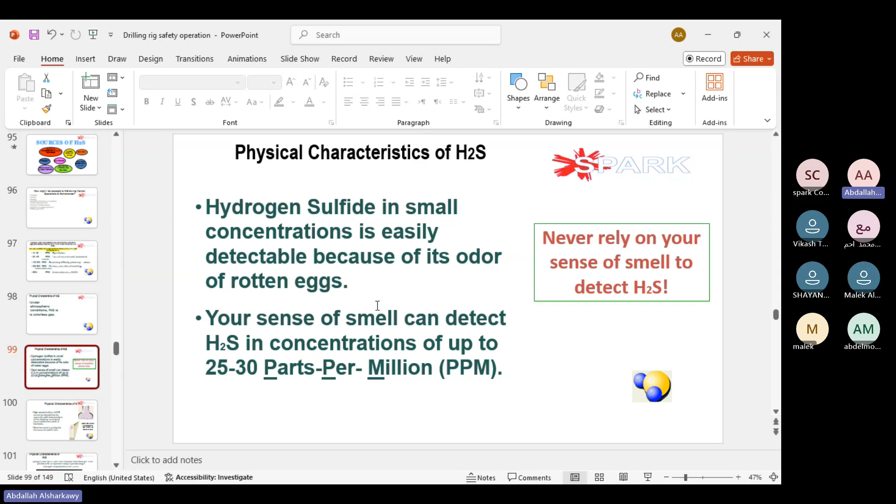Physical characteristics of H2S: high concentration of H2S cannot be detected by sense of smell, since paralysis of the olfactory nerve can occur at low levels. Once the nerve is paralyzed, the sense of smell is lost.

How exposure to hydrogen sulfide affects you depends on the concentration of the gas, the dose, and the duration of exposure.

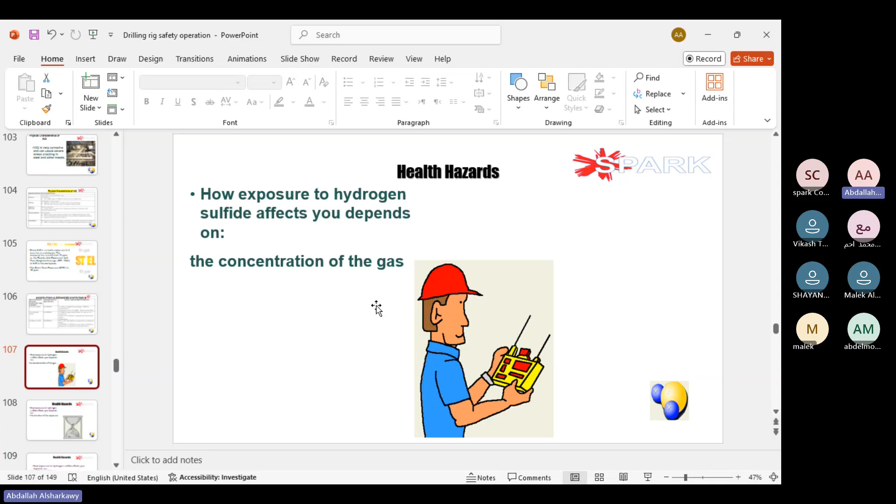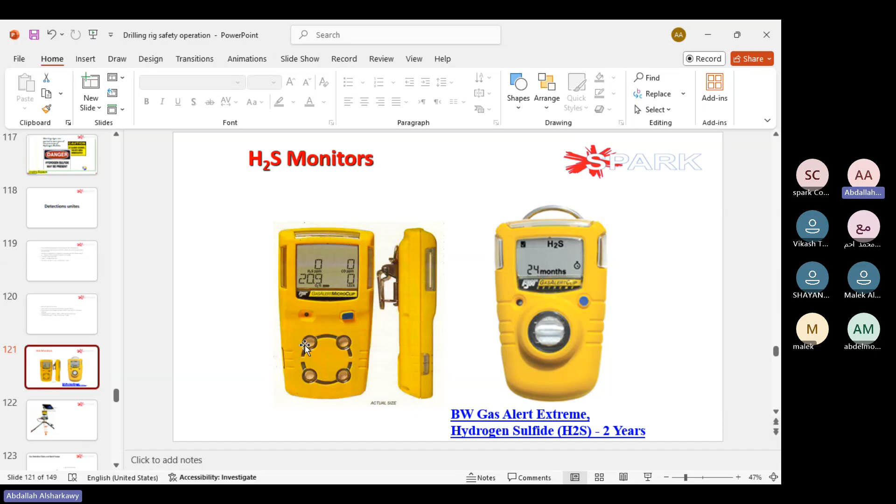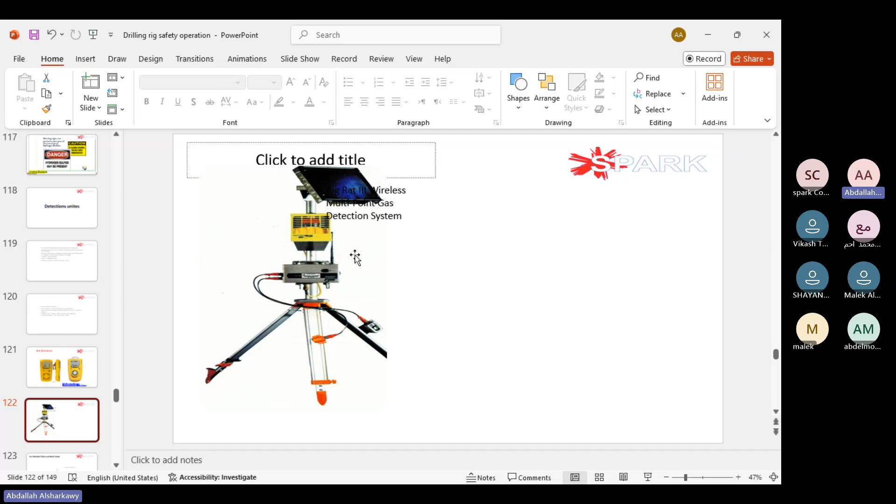Detection of H2S, by portable or fixed system. This is a personal gas detector and this is a multi-gas detector, both portable gas detectors. The second type is a fixed gas detector, installed at the drilling rig with wired or wireless connection.

Finally, many thanks, and any questions you can ask, everything you need.